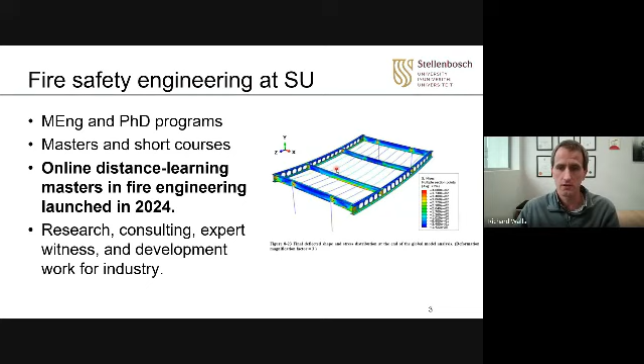We've got MEng and PhD programs, masters and short courses, and online distance learning. The MEng we launched in 2024. We do research, consulting, expert witness work, and development work for industry, so we're involved in a whole variety of topics. For instance, there was a PhD looking at the behavior of structural steel systems in fire, but we do a whole range of research in fire—yesterday we were in the laboratory testing lithium-ion batteries. There's a lot of different work going on with our team.

So where I'm going to start off with is the basics, just a bit of background before we get into structural fire engineering. I want to discuss structural engineering first: how are loads applied, and do you understand load paths? If a fly lands anywhere on the building, or you blow on it, how do those loads reach the foundation?

This is a cross section through a building. If a fly lands right there, what is the increase in the foundation reactions? Or if there's one apple on the roof, one apple weighs about 1 Newton. If you do sum of forces and put one apple on the roof, the reactions at the foundations should increase by 1 apple. So there's your apple, and then you'd have your reactions: 0.6 apples and 0.4 apples, left and right.

So this is the very basics. Same thing if you've got a gust of wind on the left-hand side of your building, you'd have some of the gust ending up in one foundation and some in the other. These are tiny little forces, so you have load paths. As long as we can make sure there is a path from where a load is applied to a foundation, then we have a safe building.

We need to make sure all the pieces between where the load is applied and where the reaction is are strong enough. So this column here, all the loads coming through it can be carried, and the same on the other side. That's where we need to ultimately end up.

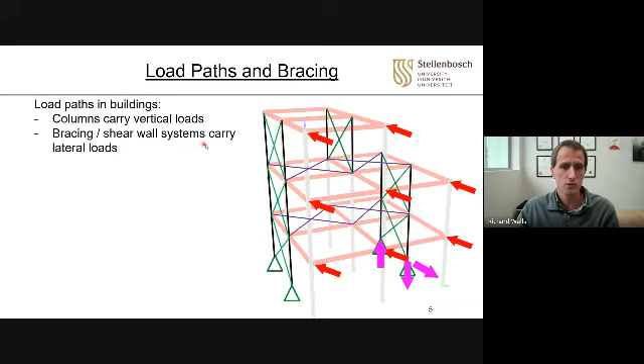But first, let's say a person is standing there. It's carried on the red beam to the columns to the foundations. You've also got bracing and shear wall systems carrying lateral loads. So just to think about it, if this is a plan view of a building, there's your columns, some beams in black, and some main girders in green.

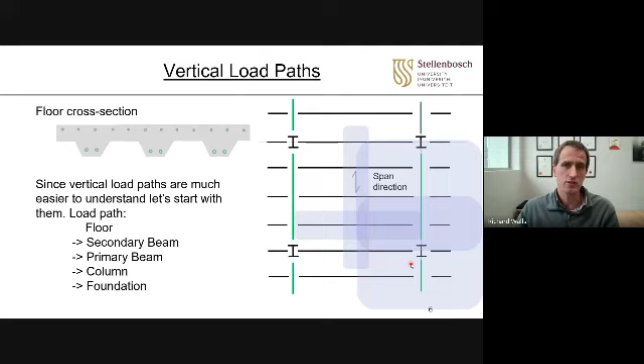It can all get to the foundation, and every piece of it is strong enough because it's like a chain. The chain will break based on its weakest link. So if one of the links is weak, it falls down.

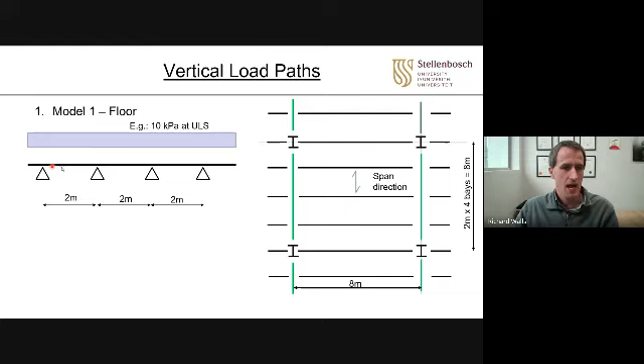So let's do some calculations. Let's say I was modeling this floor. I looked at the floor, there were 2 meter spans, so I would have a beam. I would then have a 10 kPa load, 10 kilonewtons per square meter, or 1 ton per square meter, spanning 2 meters. So I would design this beam. This is my concrete floor slab.

I would design it, and then it would be supported. Those little triangles are a support, that's what holds this black thing up. So I'm designing that, and I would get a reaction of, let's say, 20 kilonewtons per meter. So there's 2 tons, 20 kilonewtons is 2 tons. So at each point, every 1 meter width of beam needs to support 2 tons, 20 kilonewtons. Now let's say I design this little section here.

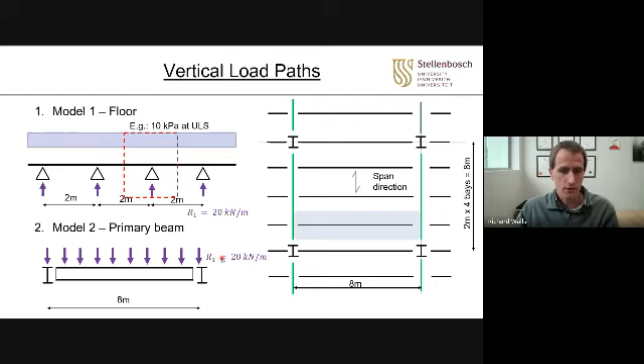That would be now this main beam. So I've got a steel beam sitting on the green girders. I'm now designing that section. I've got 20 kilonewtons per meter, that would be the purple load from here. It's now applied here, and I would design this beam to span from this side to this side.

So I can now find what the reactions are. What do the main girders have to support? Each side I have to support 80 kilonewtons, or 8 tons. So my load goes from my slabs to my secondary beams, beams to my primary beams. Now I design my primary beams, and there's an 80 kilonewton point load, 8 tons, at each point.

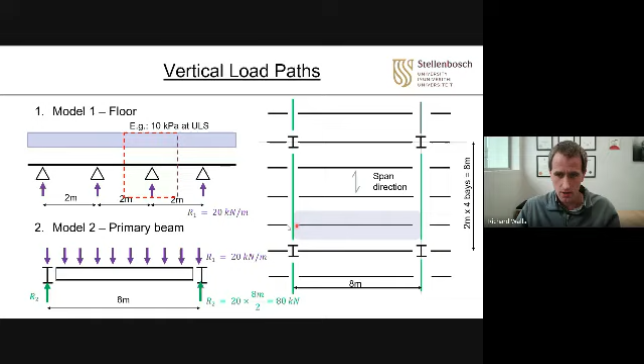Now I've got my primary beam, or girder, and let's say the black beams are the little ones, and I'm designing this whole area. At each beam I've got a beam from the left and a beam from the right, so I now have 2 point loads, 160 kilonewtons, 16 tons. I would design my beam to span from column to column, and ultimately I get a reaction of about 240, because it's 160, 160, 160, 480, divided by 2 gives me 240.

I now have the force on the column from each beam, and from each column I have some more load, and ultimately I get to, for instance, 640. The exact numbers aren't overly important. All I wanted to show you is that you have load transfer through a structure, whether in fire conditions or during an earthquake - the load passes piece by piece and gets to your foundation. If any of those pieces break, it falls down.

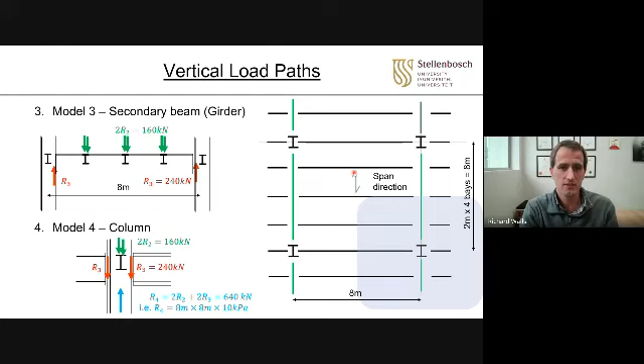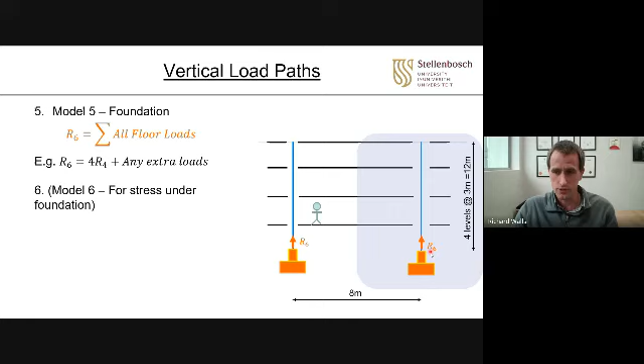So ultimately, your job is to make sure it doesn't fall down. It doesn't matter whether you're the fire engineer or the structural engineer, you get involved in this, because fire engineers may specify the requirements for the structure. So that's what I'll start covering now, how to get there. You may even need to design the foundation - if you add up the loads of all the floors, you get a force load at the foundation, and then maybe you even need to check the soils underneath to make sure the soil is sufficient.

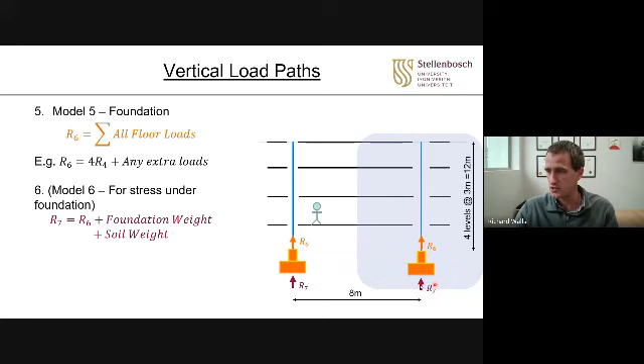Now, when it comes to the design of structures, my assumption is the Indian Code of Practice is probably similar to the South African Code of Practice. Ours is based on the Eurocode, and if you go through, the requirements are probably not very different. I may be wrong, but for instance, if you look at our Code of Practice and search for the word 'fire,' it comes up 11 times.

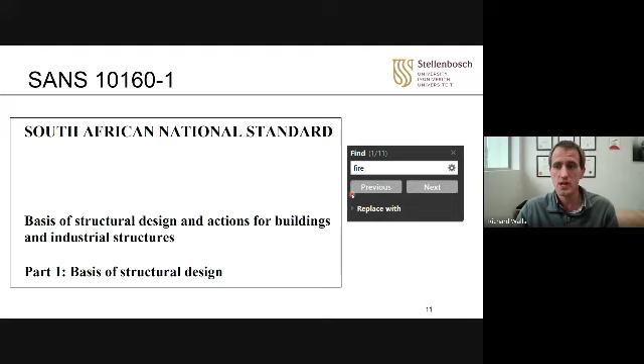Now, if you go ask most structural engineers, do you need to design a building for fire, or is it your responsibility to design for fire? They probably say no, they'd say it's the fire engineer's job. But you've got various design conditions in the structural design code, and it's useful to understand these code guidelines.

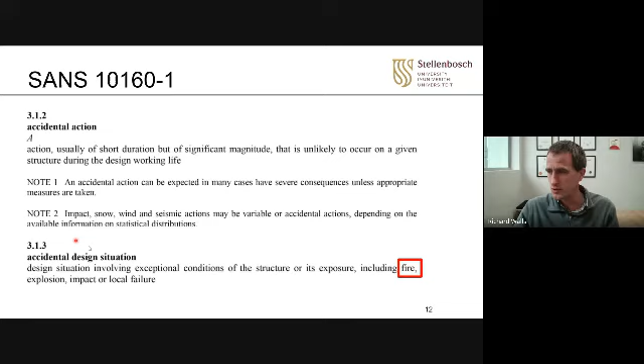You have what's called accidental actions, which is something you don't expect. You do expect wind, people, furniture, concrete and steel - those are normal loads. But you also get accidental actions, and an accidental design situation: a design situation involving exceptional conditions of the structure or its exposure, including fire, explosion, impact, or local failure. So you actually need to consider that in your design - it's an accidental design situation.

If you have a look at requirements for structural integrity and robustness, a structure shall be designed - and whether it's a Eurocode, an American code, or an Indian code, I'm pretty sure all of yours will have the same sort of phrase. A structure shall be designed and executed in accordance with the limit states procedures of whatever code you're using, for unidentified and identified accidental design situations.

So, in order to provide compliance with the basic requirements, abnormal events involve exceptional conditions of the structure or its exposure to fire, explosions, earthquakes, etc. So you need to design for fire.

And then, for instance, these would be limit states - different limit states. If you're not familiar with the term, it's what sort of conditions do you need to satisfy. The first one: make sure it's strong enough. The second: make sure it doesn't fall over. Another one is make sure the foundation or the soil doesn't fail.

This one is an accidental limit state involving accidental and seismic actions - make sure even if something unexpected occurs, like an earthquake or a fire, it's still strong enough, it's not going to fall down. Damage is accepted - you allow your building to get damaged, but you don't allow it to fall over.

You also get fatigue failure of the structure, and then in the case of fire, structural resistance shall be adequate for the required period of time. So you must check fire resistance.

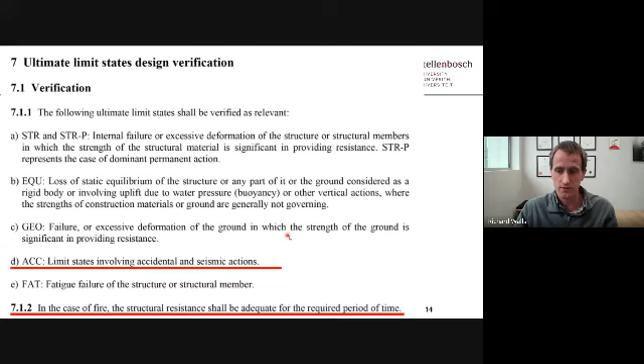This is typically very badly done in practice. Often everyone assumes everyone else is doing it - the fire engineer assumes the structural engineer, the structural engineer assumes the architect will do it, the architect thinks the fire engineer will, and no one does it. So often protection of the structural skeleton for fire is very poorly done, but that's just the nature of the beast.

So what is failure? What are the failure scenarios that can occur? Imagine now if you designed this building - imagine you were the engineer, you designed it, you signed it off, you said here you go, you have a building. Now this was the famous Cardington tests done in the UK, and what you'll notice with this structure is they ran a large-scale fire test in it - very, very extreme damage to the structure and major floor deformations.

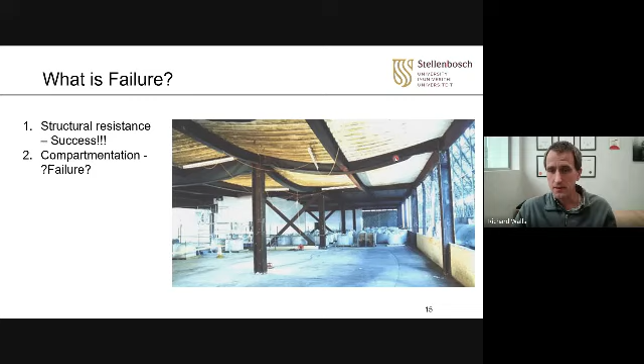Now, imagine if you arrived at this building, would you think, hey this is a success, or hey this is a failure? Well, it depends. If all you're looking for is structural resistance and you want to keep people safe, this is okay. You will have to demolish the building, you will need to rebuild sections, and that may be acceptable if the fire is so severe that it causes this level of damage. As long as no collapse occurs, this might be sufficient.

But for instance, if you have compartmentation, you may have failure - because, for instance, as the floor drops, perhaps now the fire can jump over or underneath walls, and that could be a problem. So that's something you might need to look at and be careful regarding. But that gives you an overview of things you may need to think about.

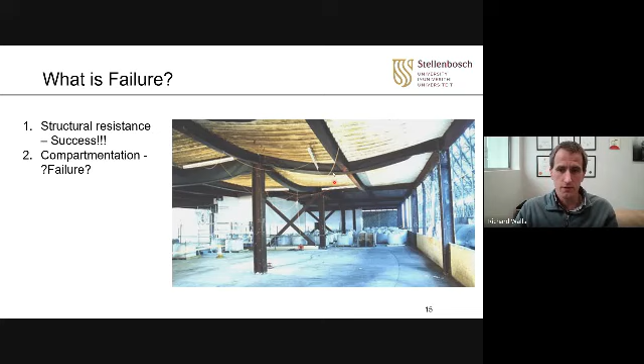So what is failure? Well, our local codes - and this will be very similar in your code, American codes, etc. - you'll typically find the ISO 834, the EN codes, the Eurocodes, the ASTM codes, etc. They're all basically the same as this.

If you have a floor or wall, the requirements are stability, strength, or structural resistance. Is it strong enough? Load capacity and deflections. If it experiences a fire, will it fall down? Will integrity be maintained, so the passage of smoke and flame through the slab must be prevented. Or insulation, which limits the amount of heat allowed to pass through. The average temperature rise of the upper surface may not exceed 140 degrees Celsius, and the peak temperature must not exceed a certain limit.

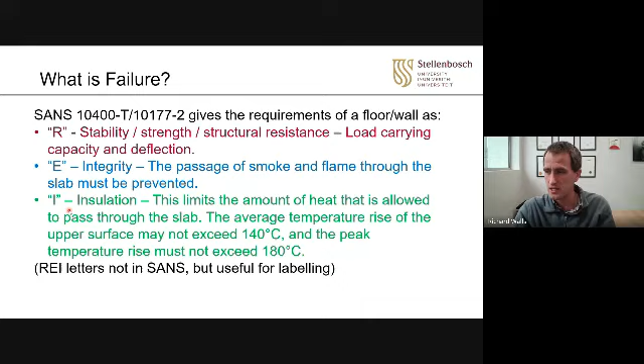If you want a wall to pass a fire test, you need to satisfy all these criteria. Is it strong enough? Can smoke and flame pass through? Can it prevent heat from passing through as well? If you had a really thin steel sheet, it heats up so fast that something on the unexposed side can ignite, so you'd need to check structural adequacy, integrity, and insulation.

In some codes, you can have different requirements. For instance, you may have 120-minute structural, 60 integrity, and 60 insulation. That may be sufficient depending on where you are. So this is just a description of what failure is, what the failure requirement is that you are looking for.

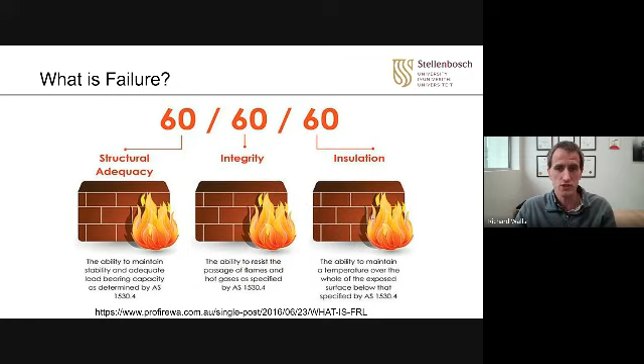This is important because if you understand this and are designing fire safety systems, you can specify them more easily. You can sometimes look at something and say that's not going to work. A thin steel sheet is never going to function as a firewall because even if it prevents smoke and flame from passing through, the insulation requirement will fail quickly. It's too thin, too highly conductive, energy will pass through and it will fail.

So this is where you need passive protection. You need systems to protect your structural elements - beams, columns, slabs, whatever it is. Passive protection is required to keep structures safe in the case of a fire.

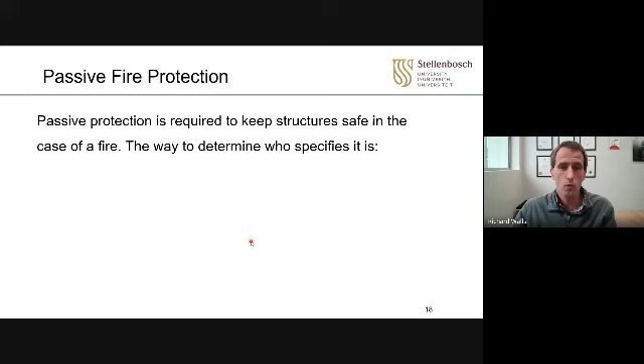The way who determines it, who specifies it is: the architect and the structural engineer stare at each other, and the first person who blinks gets the job. That is the sad reality of passive protection. Normally it's everyone's fault and no one's fault, and it's forgotten. It's a big issue, but probably the same in India as well. The fire engineer has already said it's not part of his or her scope, or hasn't been appointed yet, or has notes on the drawing saying it's the structural engineer's job.

So what are your steps to rational design? You've got to develop fire scenarios, do heat transfer calculations, and then do structural design. Firstly, what is your fire? What is the scenario your structure has to satisfy?

So you'll have that red fire curve, which we'll discuss soon - this is gas temperature versus time. So you would have your time temperature scenario. Once you know what scenario you have, how hot does your structural system get? For instance, this is a heat transfer analysis through a wall.

There's, let's say, a gypsum board with a steel stud and another gypsum board - this is just a normal drywall. The fire is applied there, and then you look at the heat transfer and whether the system would be strong enough to carry the load after 30, 60, 90 minutes. Then you would do your structural design - calculate structural loads, calculate induced forces due to fire, design members at elevated temperature.

So you make sure your structural elements are now strong enough. What's your fire? How hot do your elements get? Given that you know how hot the elements get, will they collapse? Will they be able to carry the load?

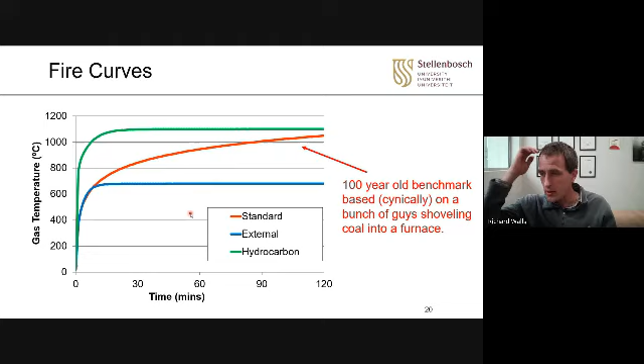This is based upon the standard fire. We have three general fire curves we use commonly. The primary one is the standard fire curve, this red line. It's kind of, well, very cynically based on how fast three guys could shovel coal into a furnace. It is a furnace curve - how hot you could heat a certain furnace to.

And you would then test structural elements in that furnace. It would heat up, heat up, heat up, and you make your furnace follow this curve. You have your beam, slab, column, or passive protection system in this fire. You expose it and see how hot it gets after this amount of time, and does it survive.

So it's a standardized test, and there are equations to categorize it. But if you have a real fire, it's a bit different. This is what you do in a furnace versus what happens in a real building.

So in a real building, you have ignition, then the fire slowly starts growing. You get to flashover, growth, fully developed, decay, etc.

So you have a distinct ignition point, and this is then temperature on the y-axis. As time goes by, smoke is being emitted, people are evacuating, the fire is growing, the couch catches fire, then the ceiling catches fire, etc.

And then you get to flashover, which is a transition from a localized fire to a full room involvement fire. It's a rapid transition. Sometimes flashover is seen as not a phase, but a line.

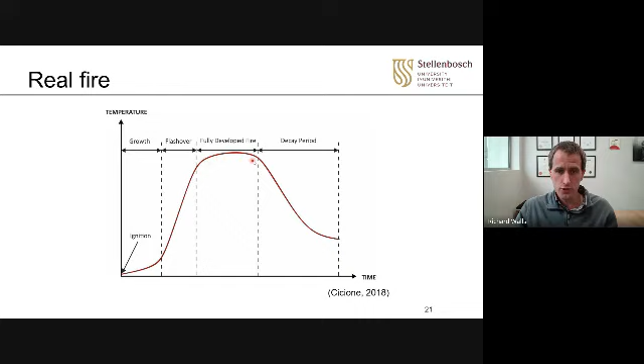That's fine. Then you have your fully developed fire, then your decay period. So fully developed, it burns as fast as oxygen can come in - it's ventilation controlled. Then once the fuel starts burning out, you go into the decay phase.

So let's now think about how tests may influence that. For instance, if you have - apologies, some of the text didn't pop up.

So you first have what you will do, it's called reaction to fire. The first thing you want to do is test for reaction to fire. Will something ignite? And if it ignites, how fast does the fire spread over the surface? So let's say you've got timber cladding or insulation materials.

If they ignite, how fast do they allow fire spread? Now that we have ignition, you may need to test your detectors, your smoke extraction, or even your sprinklers - other systems you will test. Then, given that the fire is now growing and getting to the fully developed stage, we need to make sure our structure satisfies fire resistance.

Fire resistance is captured by that standard time temperature curve. Here you have a purple curve, the standard fire curve. That tries to mimic this fully developed phase from ignition through growth, etc. And then ultimately you do not have a decay phase - with a standard fire, you kind of just capture it.

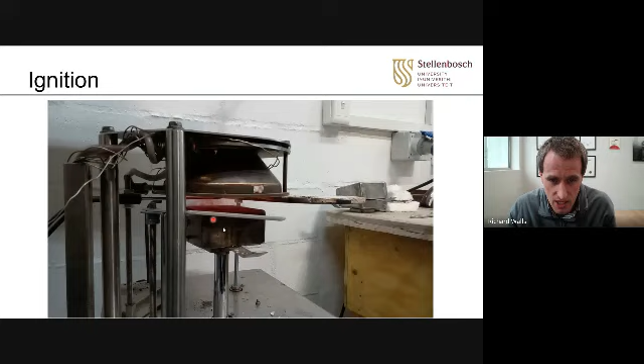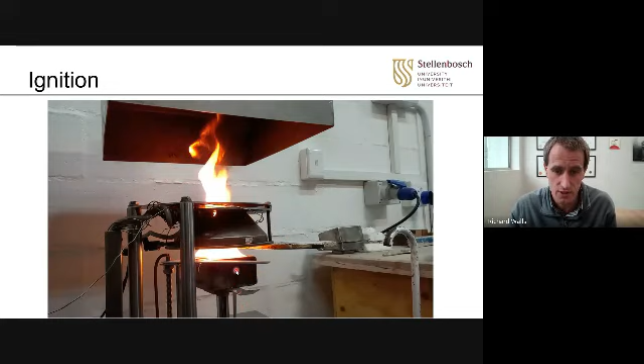A material is there, it's been exposed to high intensity radiation from a cone calorimeter, it heats, it produces pyrolysis gases, and eventually bang, you have ignition. Now you would measure the heat release rate coming off the material, and ultimately this would tell you a lot about the reaction to fire properties of this material. So that is a reaction to fire test.

Then you also have different ways of capturing this - just as an alternative, to go back: we have our standard fire curve. You don't always use this in every situation. What you can do is design for something a little bit more realistic, but it's very difficult to generate this real-time temperature curve.

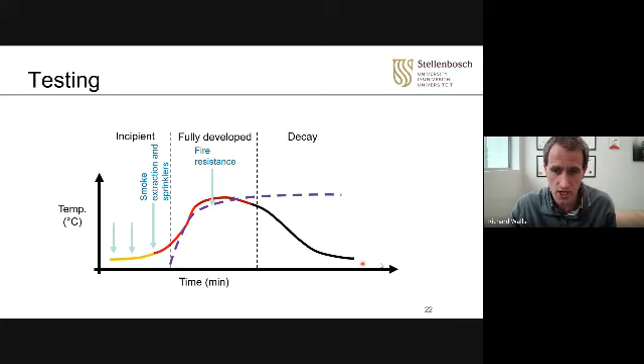So for instance, what we can do is have a parametric curve. It's kind of a halfway between your real fire and a standard fire. So you have some equations that are not difficult to do.

You can put it in a spreadsheet and generate a curve that has a heating phase and a cooling phase, and then it dies out. This is a burnout fire.

So for instance, the room you're sitting in at home or in the university may require a 1-hour fire rating. That's in the code—it says you will have a 1-hour fire. But let's say now you wanted to design it more efficiently.

So then you look at, okay, in the room I am in, what's the fuel load? What's the ventilation? And from that, you can generate a time temperature curve which describes the fuel and the ventilation in the room. And ultimately, if you design for that curve, you have a burnout fire, so it burns, burns, burns, burns out.

And if your structure is strong enough after this fire, then you're happy. Because even in a worst case scenario where all the fuel is consumed in the room you are, it still doesn't basically burn up, you're good.

realistic-ish fire. It has a heating phase and a cooling phase, and it's ventilation controlled and then fuel controlled. So initially it's how fast it can burn, and then, well, hey, you have ventilation controlling it, and then it dies down. So you can also have other curves that you generate.

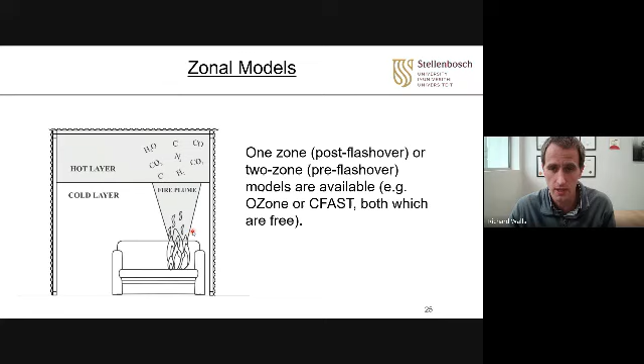If it gets really complicated, you can also use computational fluid dynamics. So this video you will watch is actually from a forensic investigation we did. This was a very, very expensive fire, caused large-scale damage to some key infrastructure.

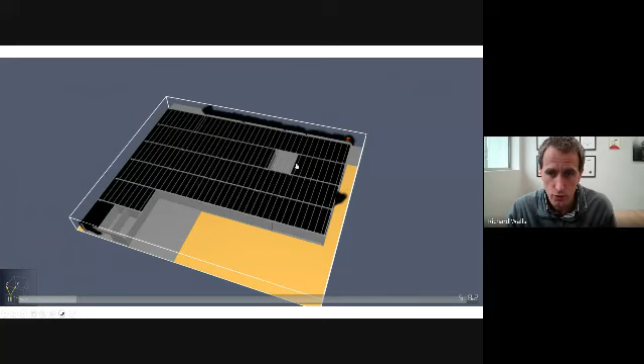And we went there, did the investigation, and from eyewitness accounts, it appeared that the fire started next to a certain room. It ignited, and then the fire spread through the room. And what you will see is that the combustion is occurring right along the edge there. So there's ignition, and then there's lots of fuel stacked around, ignite, and then it spread.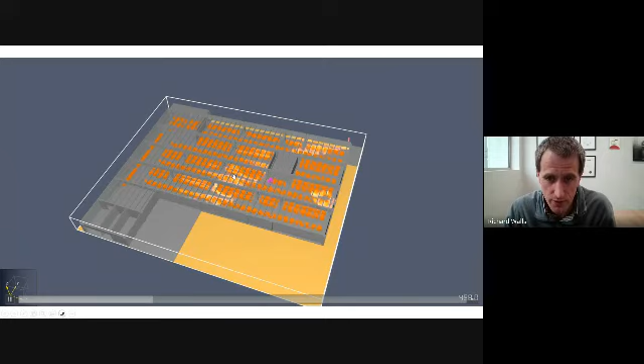So this was then a fire that spread through, and you see it ran out of oxygen in the middle. So you see the fire moving towards where it can find oxygen. It ends up only burning at the openings, fierce burning at the long window on the side, and it burned...

for many hours. This was a 20-hour fire, very severe. The fire department really struggled to put it out. It was a bit of a disaster, and ultimately led to structural collapse.

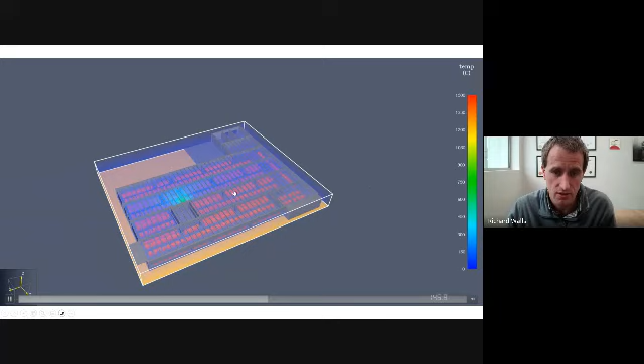So there's the sort of temperatures you get. You'll see in the flame zone, you've got more than 1,000. But on the inside, because of this ventilation starvation—so oxygen starvation, way too little ventilation for the size of the room—once the fire grows, so there's the temperatures, it spreads out, and then, oh dear, it actually gets a lot cooler.

And so you can use this to also then predict what the temperatures would be in a real occupancy. You can also have localized fires, so for instance, if you have a transformer or something—a transformer fire, a pool fire, a petrochemical fire, a tank fire.

You can have a localized fire where it's got a distinct diameter, a heat release rate that you can calculate, 500 kilowatts a square meter or 1,000 kilowatts a square meter, depending on your fuel. And then the hot gases rise and then disperse, and you may get ceiling jets.

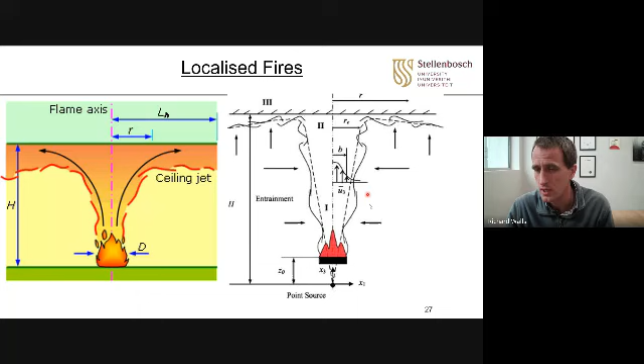And this you can also use to predict the behavior and temperature that you would use, and then you can design your structural system, your walls, your slabs, whatever it is for this. You also get traveling fires, worked on by Clifton. So for instance, you have your near field and your far field, as the fire moves through the building. It's a lot more complicated to apply these.

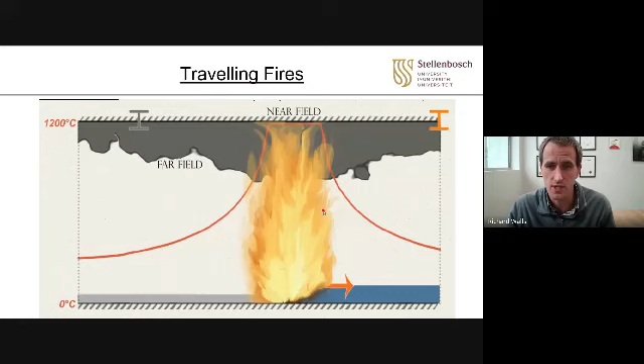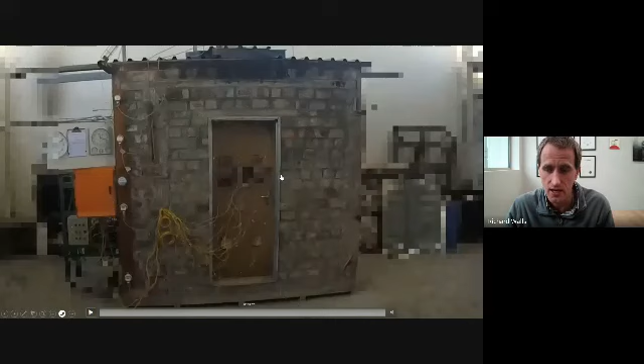Now, how do you test? This is what a furnace test would look like. It's a big box, insulated, with burners on the side. These are diesel burners pumping in hot gases, and they adjust the burners so the gases on the inside hit the standard fire curve. And this is a door fire test.

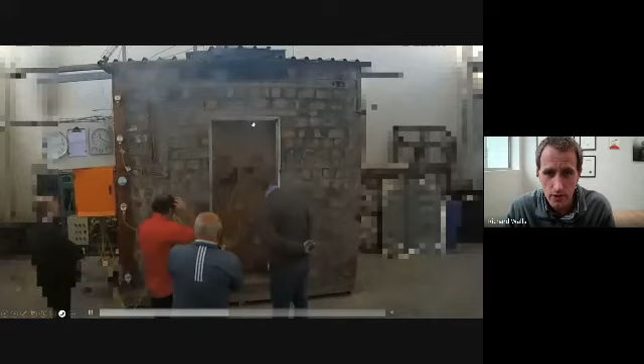You can see the door starts failing, smoke comes out - that's an integrity failure. There's your integrity failure again, fire coming through. Uh-oh, that's not good, and ultimately you have a failure of the door. This would then be measured, for instance at 10 minutes, 30 minutes, or 90 minutes. So the box, the big burners, everything inside the gas temperature follows the standard time-temperature curve, and you see how long your element withstands this.

So let's start having a look at different structural systems - how you design steelwork, concrete, timber, and composite for fire resistance. In terms of steelwork, steel's possibly on the simpler side. You can rationally design it and save a lot of money. What you need for steel is passive protection.

So you coat the steelwork with a board or a paint or something else, and make sure the steelwork holds out. Then you have concrete, where you make sure there's concrete cover, a sacrificial layer of concrete on the outside to protect your reinforcing steel, your rebar in the middle. For timber, you have sacrificial cover, so you let the outer part burn and the inner part hold on. And then you've got composite, where you have passive protection and good rational design - you can also design composites, so steel beams, concrete floors, can actually be designed to be very efficient.

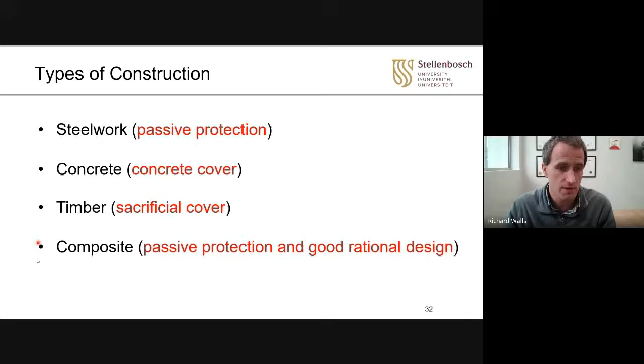Now, steelwork and fire - it is possible to have unprotected steelwork. Only critical members need to be protected in certain types of structures, such as composite floors. Protection is done using boards, intumescent paint, spray-on products, concrete encasement, etc. Connections can be very important - it's often connection failure that triggers collapse.

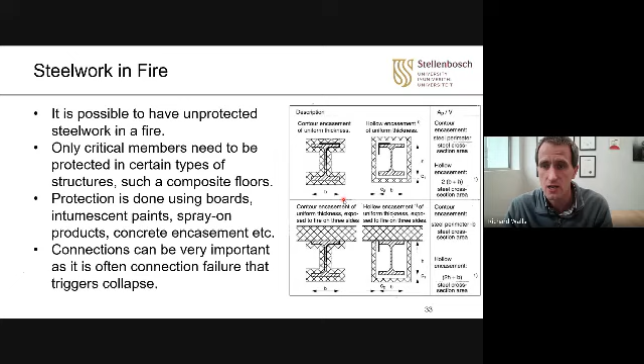So, for instance, here are different beams, and you would want to look at your exposed perimeter divided by your cross-sectional area. This beam or column here has a lot of perimeter where fire can affect it and heat it up, so it will heat up very quickly. But if you had a concrete slab and a box, the perimeter is much lower, so even though the beam is the same and the fire is the same, this will heat up faster than that one. You can optimize your design, and there's a lot of money in these passive protection systems - optimizing the passive protection design to bring the cost down by going from A to B.

Okay, so these are some products. For instance, this is an intumescent paint, and you can see how they swell. It provides a low conductivity material, and ultimately, provided that it doesn't fall off, it gives you good insulation to make sure nothing happens to the product. So that is how the different products behave.

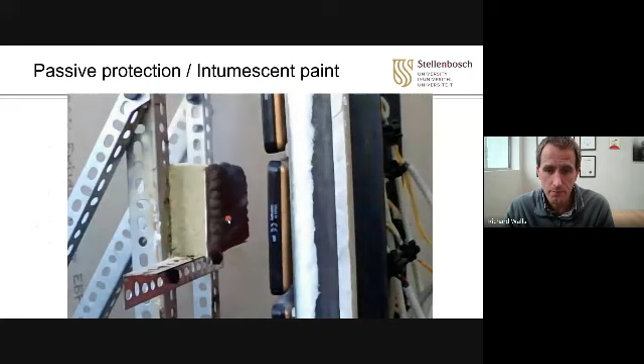But there are a whole variety of these boards and slabs. The board systems don't activate, but the intumescents do. The biggest problem with an intumescent is often they get too heavy and then they just fall down and become useless. So you've got to make sure in a test that they don't delaminate, that you don't have fall-off behavior, because it can very easily occur.

Now, why would you want to rationalize the design? So this is in South African rands. The main picture is these are 3 different column sizes or steel sizes. This one's 23 kilograms a meter, this is 46 kilograms a meter, and this is 137. So it's small column, medium column, large column steelwork.

That's the mass. This is the section factor, your heated perimeter over area or heated area over volume, same thing. And as this value goes up, it heats up faster. This is the cost of the steel in rands per meter, and this is the cost of the paint. So you can see with a skinny member, the paint can cost more than the steelwork itself.

So on a big project, this can lead to a lot of money. So with good rational design, you can bring down the cost, make your client very happy, and get to an efficient solution. But also, as it gets thicker and heavier, the cost of the paint and the total cost of the paint relative to the steel comes down and down. So that's a good thing. You want to be able to do that.

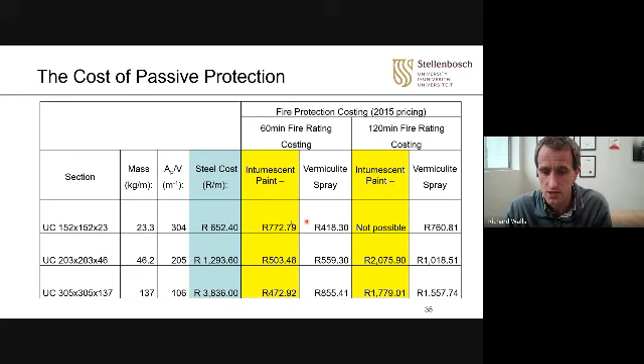If, for instance, you want to go from 60 minutes to 120 minutes, you actually see the cost going up further and further. And what you also may see is the cost of the paint doesn't double going from 60 to 120 - it may be 4 times or 6 times. Yeah, 4 times here. So the coating cost can be very expensive. Just be aware, this is kind of old figures - these are 2015 numbers I have, I should update these at some stage. But yeah, good rational design can bring the cost down.

So let's start thinking about steel and how it's affected in fire. This is the strength with temperature, the red line. As it heats up to about 400 degrees Celsius, the strength doesn't drop, more or less. Then at 400, it quickly plummets, all the way to 1200. By 1200 degrees Celsius, your steel has lost its strength. But normally at around 550 to 600 degrees Celsius, you've lost about 50% of your strength.

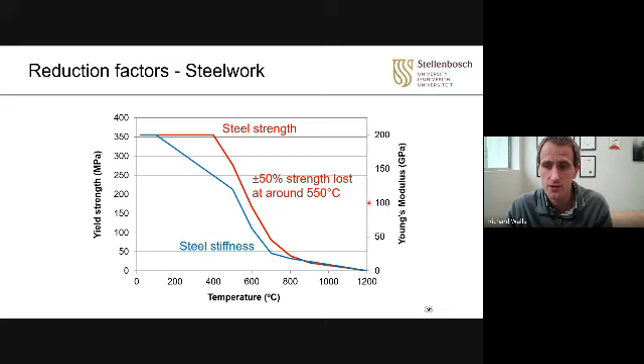So that's why you sometimes see these critical temperatures - 500, 550, 600. It's kind of roughly based on the load - the strength that you need is about half. So if you've lost half the strength, you're probably still fine. Here is then your steel stiffness - what you find is deflections occur. The stiffness drops first, but then your strength drops afterwards. So it deflects more, but then it also starts getting weaker. That's your Young's modulus and your yield strength used to measure those.

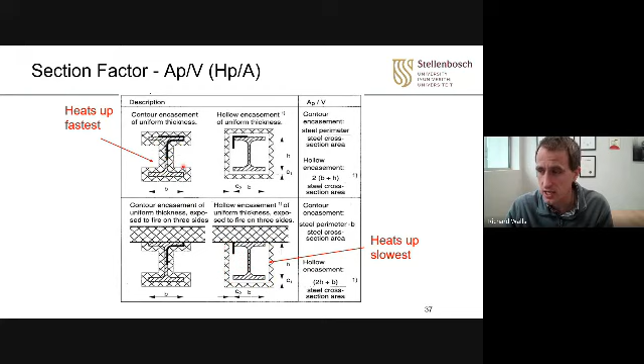And as I was saying, your section factor - this heats up faster, this heats up slower. So you can also do different layouts to get to different solutions. This passive protection will be cheaper than that there. Firstly, this is a longer perimeter, and it'll need to be thicker than this one here. The only thing is boards - you have to do a lot more effort, and this can look nice if done properly, but there are pros and cons of all the different systems.

In terms of concrete in fire, concrete typically does well. For most concrete structures, the most important thing is to ensure that there is sufficient cover to rebar. Concrete structures generally behave well in fire, although care must be taken with certain details.

So here you have a structure. This was in a project I was involved with - very, very severe fire. All the concrete popped off, rebar was exposed, severe damage. This had to be demolished. You can actually see this column here is starting to buckle, that it's actually popping out on the side.

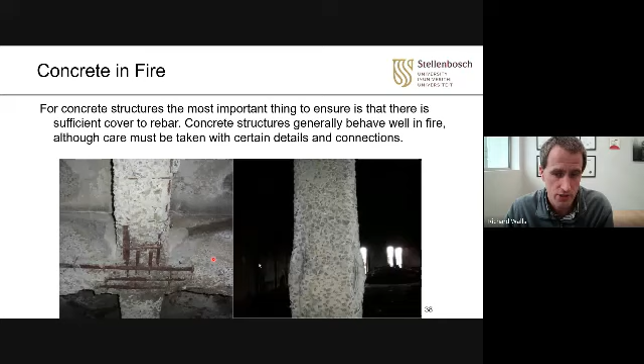So this is pretty complex. There's very, very little strength left. This is a problem - you don't want to put big machines in there to demolish it, you've got to be careful. So this is when the fire's been very severe for a very long time - this fire lasted many hours. That was the problem. It was beyond what the building was designed for.

One of the useful things with fire design is, especially with our local codes, and you'll probably find it similar with your codes, is often structural engineers focus on what's called cover. So cover is the distance between the outside of the concrete and the first piece of steel.

And what you normally do, the cover is 25 or 30 mils, but the cover is actually of secondary importance to what's called your axis distance, because the fire is applied on the outside, the heat penetrates through the concrete, and more or less where it gets to the middle of this reinforcing steel, this rebar, that's what you're worried about. So if you use the axis distance rather than the cover, you can sometimes develop more efficient systems.

So in the Eurocode, it has axis distance. So for instance, this is a table, and if you need a 30-minute, 60-minute, 90-minute, 120-minute structural resistance for different utilization factors, and the utilization factor is how heavily loaded is the column or beam in fire relative to normal. So normally your fire loads are roughly 50% of your ultimate loads. Not going to go into detail on how you calculate that, but often we're around there.

Sometimes there are differences. So for instance, let's say you want a 60-minute structural resistance on a column. You need a 36 mil axis distance and a 200 mil wide column. So this base here would need to be 200 mils, and then you need 36 mil. So if you have a 25 mil cover plus a 10 mil bar, that's already 35. Oh, okay, it's easily satisfied.

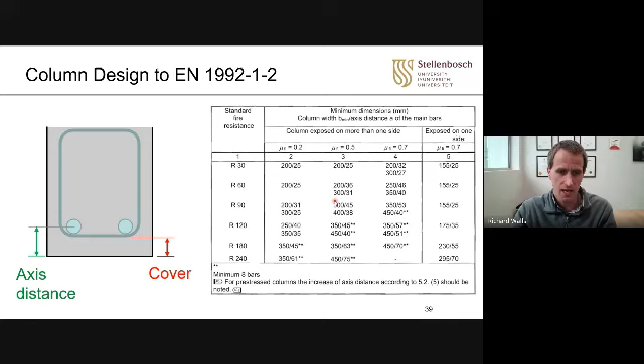So you can use these, and this is pretty quick and easy. You can get to quite easy fire resistance ratings, just pulling numbers off tables, and then you can specify cover and this and that must be, and you go, great, I'm happy.

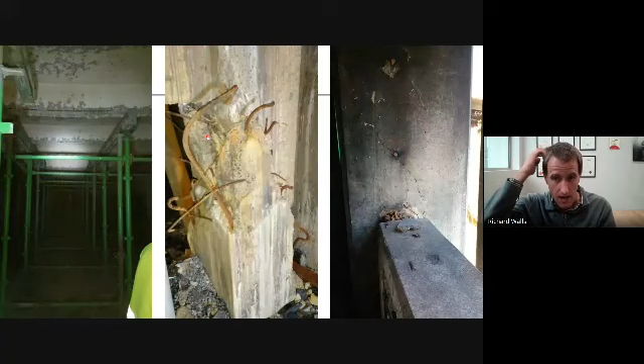This has turned pinkish. Pinkish tells you it's around 600 degrees Celsius in that vicinity. Buff color, so the fire spread affected this, permanent deformations. Chances are much of this would have to be demolished. What even happened in the structure, there's major structural collapse, there's spalling.

This is a column. Now, this is a big column. This is a 600 mil by 600 mil column. This is a big chunky thing supporting, I think it was about 500 tons, if I stand to be corrected, or maybe it was even 1,000 tons, can't remember offhand. And it's very heavily reinforced.

But what happened is that the beam actually caused this entire thing to fail, and it cut it in half, and about a meter of column is missing. On a perimeter column, the beams actually pushed it out and caused major structural cracking through the elements. So collapse of a concrete column.

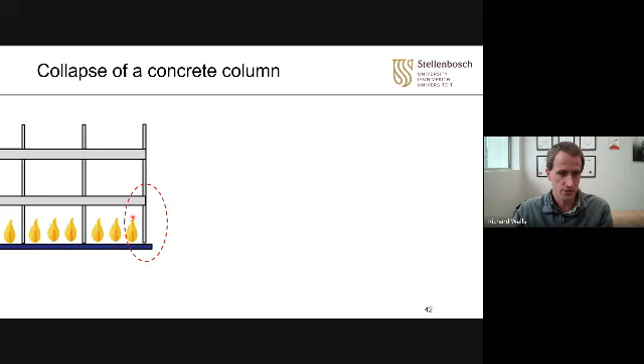So for instance, here's your fire affecting the slab, and we're going to look at that column here. And this is from a structural analysis following the other analyses. What happened was the fire here heated up the beam, and it was a very long, slow fire. So it gradually heated up, heated up, heated up. And ultimately what happened is this big beam here got hotter and hotter and hotter.

As something gets hotter, it gets bigger. And when we arrived on site, we were actually asked, hey, could it have been an explosion or something else that caused damage? But I said, no, have a look. This is a diagonal cut through this column. And a diagonal cut is a shear failure. It's a horizontal force. And people ask, why? Hold on, there was a vertical load coming down there. How come there was a horizontal force that caused failure of this column?

Well, what happened was this beam expanded. Thermal expansion, push, push, push, push, push. And it was an edge column here that failed because there was a retaining wall and there was nothing holding it back. If it had been fixed to the retaining wall, the retaining wall holding it wouldn't have come down. Push, push, push, push, push. And to the point it actually failed this column because this was about a 400-ton lateral force. So it's the weight of about 400 vehicles sideways. So you can imagine a cable hanging 400 utility vehicles, small trucks, and that would be the sideways force this beam exerted and failed this.

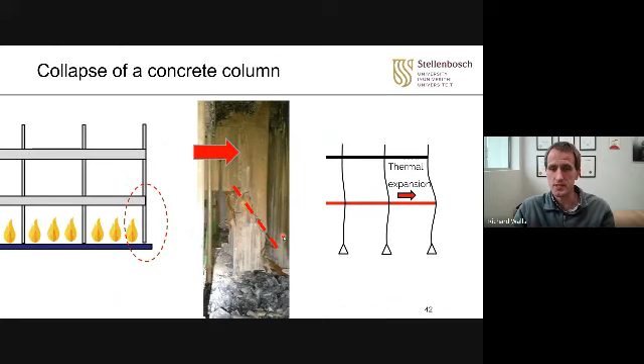So there you go, so you now have sagging. If you want to design something, you can design beams and slabs and columns, so you can follow different calculation procedures. So for instance, if you wanted to design a beam, what you do is, there's your original beam size.

You work out the heat or temperature through the section at different times, and for instance, you find your 500 degree Celsius isotherm. It's a bit of a rough and ready assumption, but what you say is everything hotter than 500 degrees, ignore, pretend it doesn't exist, and just design a smaller beam. Structural engineers are actually quite good at that. So you design a beam as if it's smaller, and then your steel, you design it at temperature, let's say 600 degrees Celsius. You can now check the capacity with rebar that has 47% the strength, and then a smaller beam, and follow the same design calculations.

That's if it's sagging, so the bottom's in tension. If the top is in tension, what we call hogging, you design the rebar within a reduced cross-section, and then your effective depth changes. We're not going to go into that, but that gives you an overview of how you design a concrete element for standard fire resistance.

This would be, let's say, 20 or 30 millimeters of concrete loss. But for a 2-hour fire, maybe you'd lose more. So there are standardized numbers you can use to specify the resistance you need. But one of the things is that people assume concrete is always safe, but not necessarily.

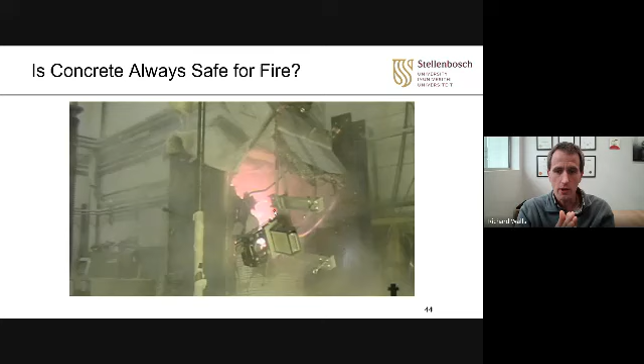So for instance, for tunnel design, what they actually have is a little mobile furnace that you move in, put on the side, and run a fire test to see if your concrete lining would spall. Because you can't use this method if you have spalling, since this method assumes the concrete stays in place. But if you have explosive spalling, it's a big problem.

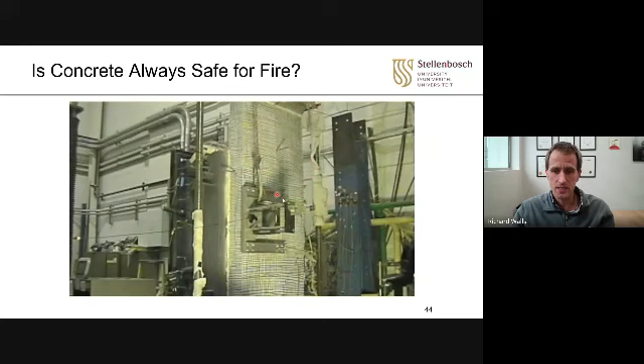So there you go, just to show you once again. Bang. Heat it up until the point where it actually blew. Quite scary failure, very, very problematic. That would cause a lot of damage to areas around.

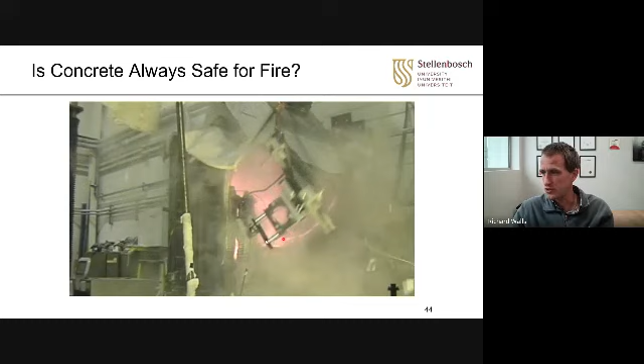You can also design composite decks. For instance, as I said, composite deck is steel columns, steel beams, concrete floor on top. The BRE Cardington full-scale tests, amongst others, showed that composite slabs behave very well in fire, even when the steelwork is not protected. To design these systems, for instance, this is a plan view of a building: you protect your perimeter beams, and then you just allow the beams between to fail.

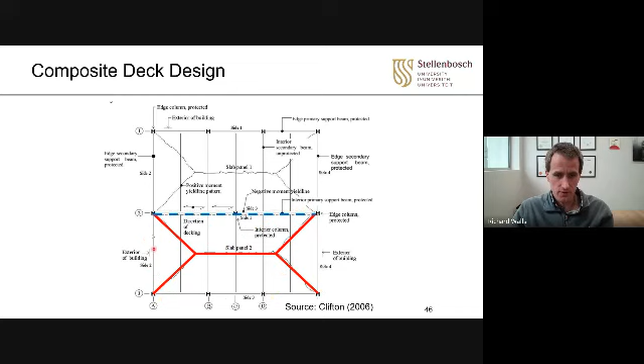If they fail, so what? Because they hang - that picture I showed earlier where the floor hangs, it just hangs, and you allow for protection around the edge. As long as those beams are protected, then you're fine, because this hangs from them and carries the load. You design your beams for the full load, you design your columns, and you're happy. So you can save quite a lot of money.

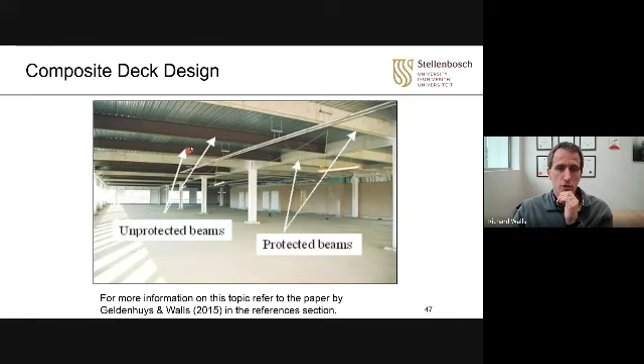So for instance, in this structure here, column, beam, this shows you where the secondary beams are not protected. This would lead to quite significant savings, because maybe you have 50% of beams, and the cost of this passive protection is high. So your client's going to love you if you can knock half the cost of the passive protection off your beams.

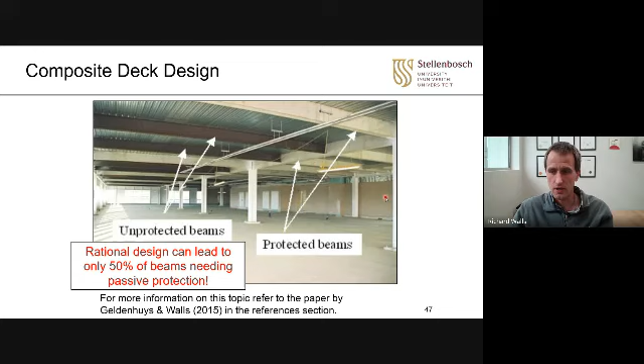And so that all goes through, but you would need to make sure your beams, slabs, columns, the white ones here, are strong enough. So you design those and leave everything between. This requires rational design, so you need to be quite careful with doing it, but it can be done to develop rational fire designs for composite systems. Timber, you also can get timber and fire - timber structures with heavy members can survive severe fires.

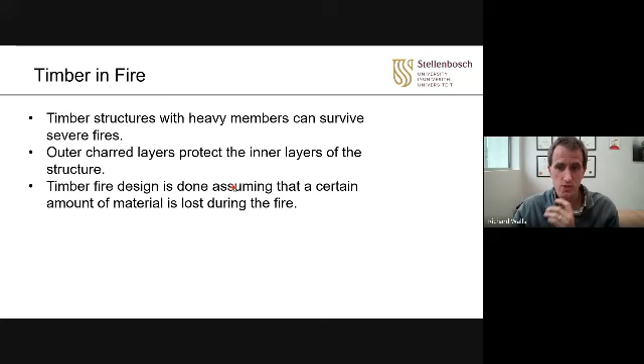Outer char layers protect the inner layers of the structure. Timber fire design is done assuming that a certain amount of material is lost during the fire. So this would be the basis.

You use your residual cross section, and as long as the residual cross section is fine, then you can design for it. So what you want to make sure is that the beam is big enough, even after a 1 hour or 2 hour fire, it's still sufficient.

And you can put products on. So let's say the timber is too expensive, you can clad it. You can put an intumescent coating on it. There are various things that you can do to try protect the timber and get to a result.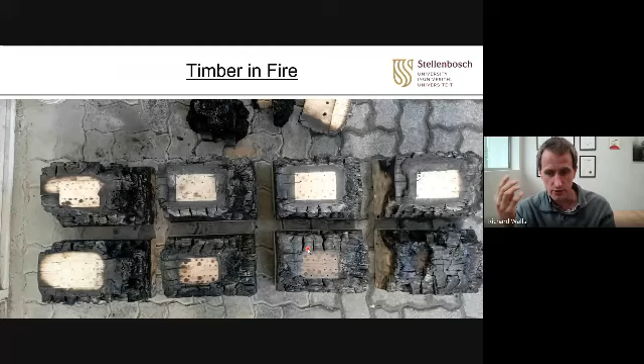So that kind of gives an overview of your main structural system. We've had a look at, firstly, what were your design fires, whether it was a standard fire, a parametric fire, a real fire, which can be developed using computational fluid dynamics or others. And then we had a look at heat transfer. Then we had a look at steel, concrete, timber, and composite. And different structures come with different risks.

So you just have to be careful now. Sorry, one thing I didn't mention is that earlier we discussed reaction to fire tests. So remember, reaction to fire is, can it burn? How does the fire spread? So a timber beam can have a good fire resistance, but a poorer reaction to fire.

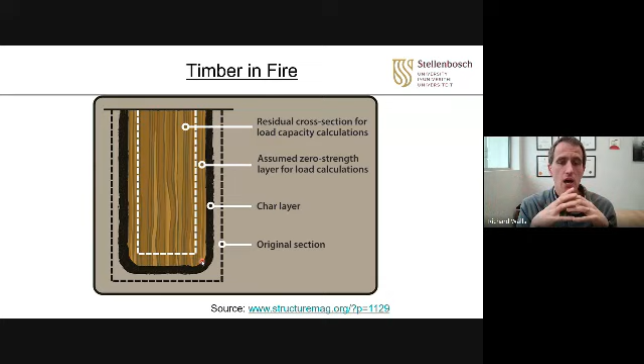So when a timber structure burns, it's going to release a lot of heat, so you will need to use a more severe design fire. So let's say you used to need a 30 minutes fire rating, you may now need 60 minutes, because now your skeleton of your structure, your beams and slabs and floors contribute to the fuel, so they will burn more intensely. There you go.

So now different structures come with different risks. Buildings can be designed to withstand fire. Fire scenarios should match the risk. So also, the standard fire scenarios are useful, but they are standardized. If you have high-risk facilities, you should use a different design fire, not necessarily a 30 or 60-minute fire. You may need to use a more complex fire scenario.

Standard fires are different to real fires, so I hope I pointed that out. And the early phase is where you have ignition, smoke spread, that's where people die, and then you have your post flashover phase.

General structural fire resistance: restrained thermal expansion is the primary reason for damage to buildings. The building breaks itself up as it heats up. So in a real building, as I showed you with that concrete member, as it heats up, it exerts very high lateral forces, and it's those lateral forces where structural collapse normally occurs. It's very difficult to predict, but that is a major problem in real buildings, that expansion.

And especially where it's got nowhere to go, it pushes, and it can cause shearing and failure of structural members. So you want to avoid against that.

Good rational design can provide much safer structures. So what you can do with a high risk or expensive or fancy structure, you actually rationalize it. You go, what's my fire? What's my heat transfer? What are my load scenarios? And then you develop a rational design situation to develop an entire structural system. Your entire structural system would need to accommodate all these requirements to make sure it's strong enough, the smoke and fire does not spread, and then also it has sufficient insulation resistance. The heat transfer doesn't occur through it too fast.

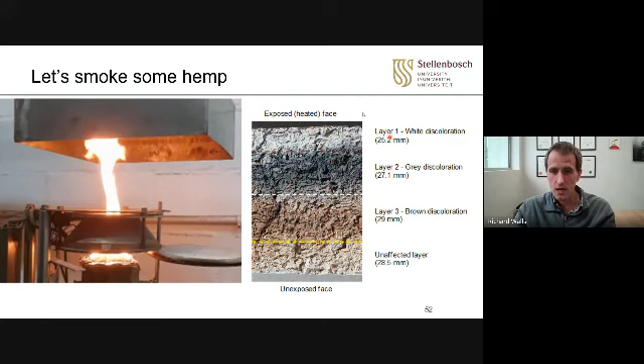If you mix it with a stabilizer, cementitious product, you can build blocks. And here you go, this is unaffected. You can then do a rational design based upon this. So you would test it and then even check what is the residual structural capacity. So this part would fail, but hey, this part can still carry load. And then that would be in the furnace.

So furnace tests were done to evaluate it. You can do cone calorimeter for reaction to fire, fire resistance test to check charring and behavior. And then that would be a way to assess these sorts of products. So that would be if you have a novel, unusual, non-codified product, how you would start assessing it. There's a lot of these sustainable products coming onto the market with no fire design guidelines. So we would put it through its paces, assess it in various ways, and then find out what was its fire rating, what was its reaction to fire, etc. And then you can evaluate it, whether it was safe or not.

So yeah, that's an overview of structural fire. Hopefully it has been useful.

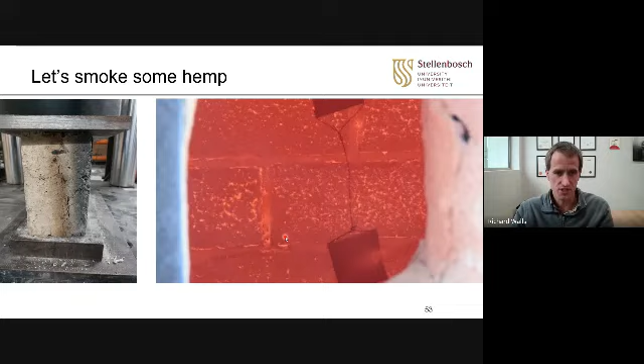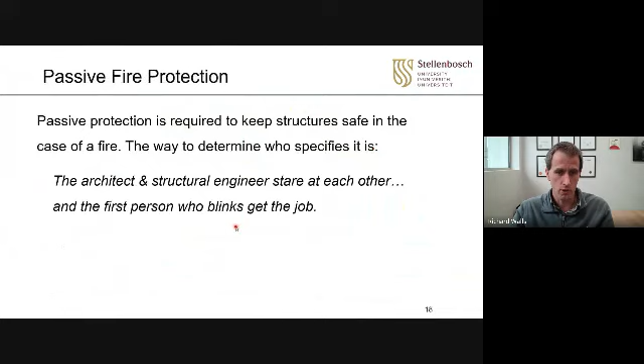The main thing I was just trying to explain were the steps here: what was your fire, what's your heat transfer, what's your structural design? And there are ways to design steel, concrete, timber, composite, etc. in fire that you can come up with safe solutions for a different system.

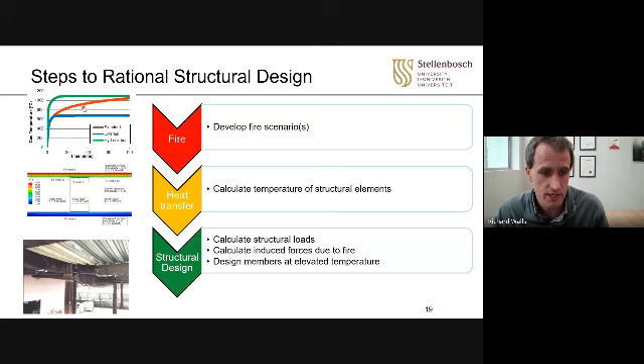This comes back to the standard fire versus non-standard fire again. If you have a standard fire, the code says you shall have an hour fire rating. The code makes no allowance for heat release rates, etc. You just follow that curve and stick to it. If, however, you have a more realistic fire scenario, you may use a Eurocode parametric curve, and you can check for your development.

So if you have very little ventilation, that would be this case, this dark blue line. What happens is it heats slowly because the ventilation limits it, but then it burns for longer. So what you see is the fire will last longer.

So for instance, for steel work, this will be a less severe fire because for steel work, the maximum temperature is important. So high ventilation will give you a worse case for steel. But for concrete, this may be worse. A long, slow fire is more dangerous to concrete. A short, hot fire is more dangerous to steel.

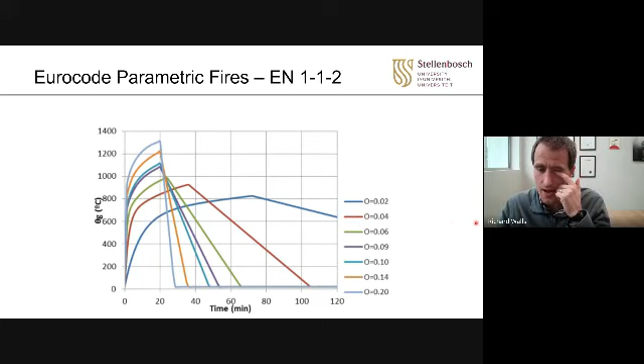So basically, when you limit your ventilation, you limit your heat release rate, and so your fire will burn longer. It's a balance between your total fuel, your ventilation, the type of material, and your room geometry. That will affect your length of fire, and then your total fire severity, and then the damage to the structure. It's very difficult to predict it accurately.

As I said, when you want to do a real fire, you end up with quite complex models like this that you need to run. That becomes quite difficult. So that question I've dealt with.

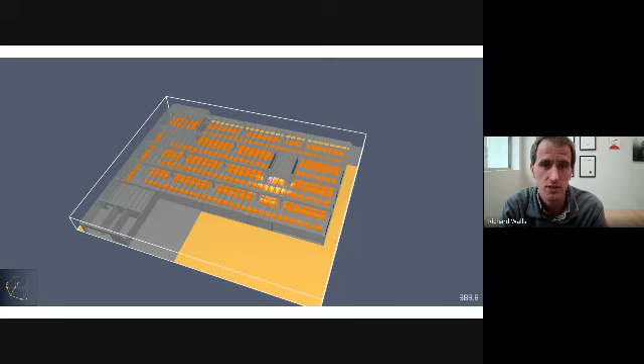Can concrete blocks from bagasse be good? Typically, concrete systems perform well, and with the addition of extenders - bagasse ash, fly ash, ground granulated blast furnace slag, etc. - it typically has very little impact on the concrete resistance. I haven't checked the most recent research on bagasse ash to see if it makes any difference, but I don't think so. I wouldn't expect it to have a significant influence on your results. Chances are the concrete would be give or take the same.

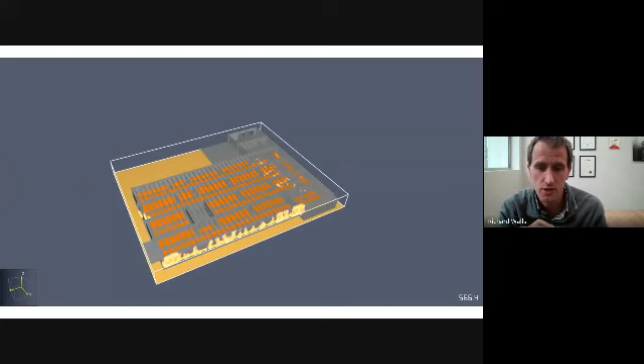Where it does become problematic is where you have high density concretes, very dense matrices, because then the steam can't escape. There are ways to address this if you have higher risk concrete. For instance, you put polypropylene fibers in - little tiny plastic fibers in the concrete - and when the fire occurs, they melt and allow the steam to escape. So it's actually one way of improving your fire resistance of concrete without doing too much.

Why not bagasse instead of timber? Well, it depends on cost. In somewhere like India, you have very little timber industry for mass timber, so it wouldn't make sense to use mass timber - it'll be too expensive. In Canada, the USA, Scandinavia, the timber market is massive. They have huge forests, a lot of design happening, a lot of R&D work, so for them timber makes a lot more sense. Whereas locally that's not commonly used, so it's less of a problem - blocks and other materials will be more useful.

I think that is all the questions posted. I don't know if there's anything else that anyone wants to ask at this stage.

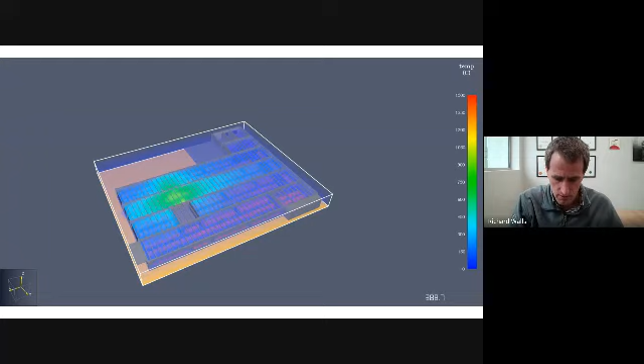What should be the ratio of fibers in concrete? I can't remember exactly. If you have a look in a textbook - Buchanan and Abu, it's a great book, Structural Design for Fire Safety - it has the details and that will help. Yeah, it's not high dosages, it's a couple of kilos per cubic meter type of thing.

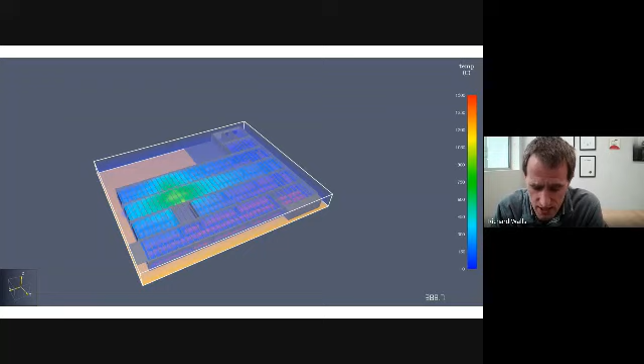Factors affecting thermal conductivity of wood: firstly, different species of timber have different conductivities. Different densities also influence it, because that affects your specific heat. So those have an impact. Additives - you can put additives on, materials to reduce the ignitability.

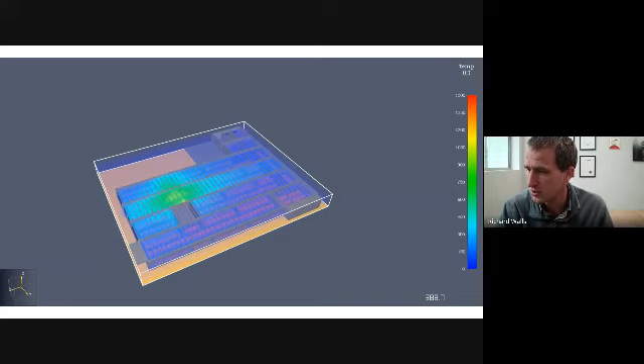I'm a bit skeptical of most of these products. You get boron impregnated materials, fire retardants, and calcium carbonate based materials that you can impregnate with, but they haven't been brilliant at stopping fires. They may delay the time to ignition, but they don't make wood non-combustible. I'm yet to see a non-combustible wood - wood still burns, you just need enough heat. So it may delay the fire, but it's still going to burn away. So yeah, you do get additives, they do help, but...

Any other questions? I'm just checking the questions at the side. Any other queries or comments that you might have?

Nope. So do you have any other questions? I'm here, I'm free, yeah.

Otherwise, I think even one of our visiting faculty, Ms. Priyanka, has joined. She is also working in the fire industry, a civil engineer basically. Oh cool, great, welcome.

It was a very fruitful lecture, especially for the students in fire engineering, because they aren't knowing much about this structure. I feel it was very useful for them. I'd like to ask one question: how does the integration of passive fire protection systems impact the life cycle cost of a building? I think it will help them understand better as a fire engineer.

Very good question, not an easy answer. So the question was how does it impact the life cycle. Obviously it's going to add cost, depending on the case. With concrete it may not add much cost because changing the cover may not necessarily change much. If you've got a steel structure, it's going to add a lot of cost to the passive protection. If you design it well, the cost can come down.